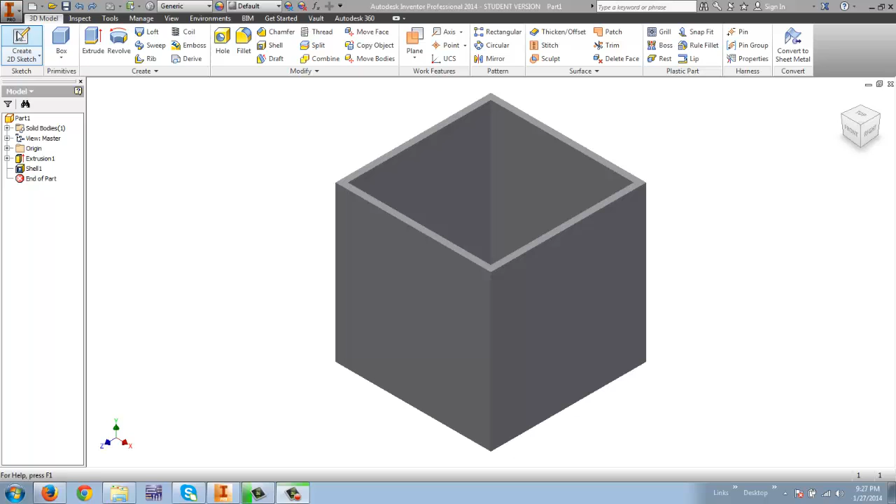Now I want to put an emboss or an engrave. We're going to talk about how to do that. I want to put that on my box. So I'm going to create a sketch on the front.

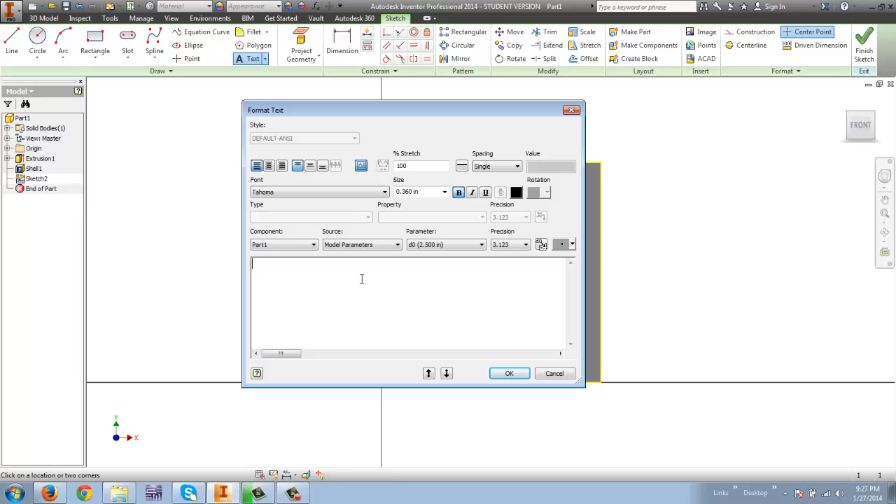And I begin by placing some text on there. You can click anywhere along here. And I want to make sure it's large, so I'm going to put 0.360 for my font size. I want to bold it, and I'm going to type IED puzzle.

And I'm going to replace that. I'm going to highlight all of that and center it and say OK. And here is my text. I can grab it and move it up. I can grab, well, that just changed it like that. I can grab a corner and I can drag it.

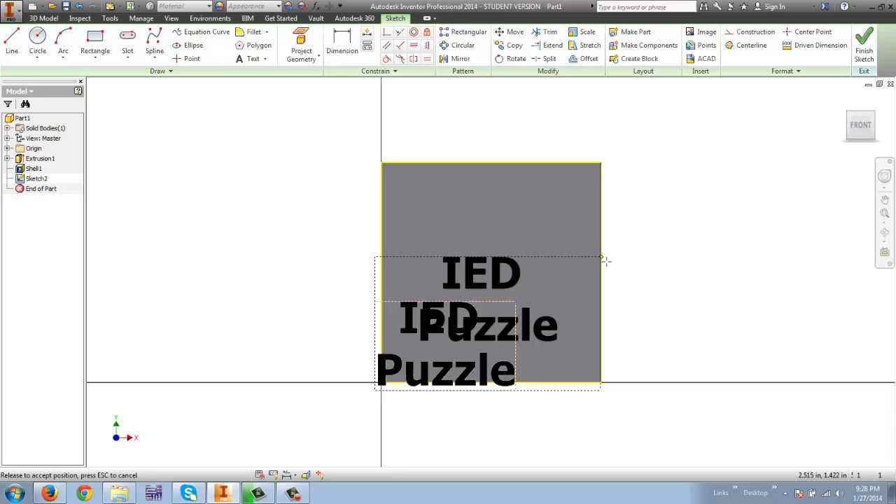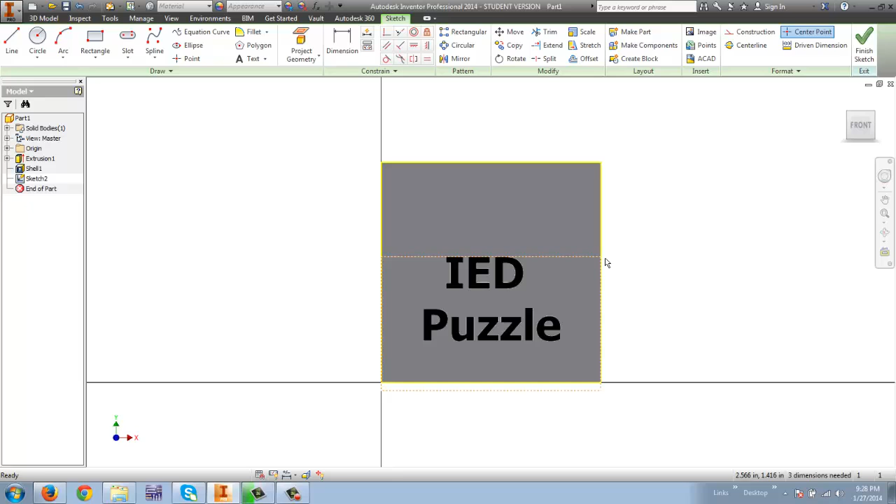If I want to make sure it's centered, this is one way that I could do it. I could actually make the box width be on the actual corners. That would be one way that I could center it. Another way, let me change my box size. Oh, you can rotate as well if you grab the corner correctly, and I've got that attached, so it's not going to let me change it.

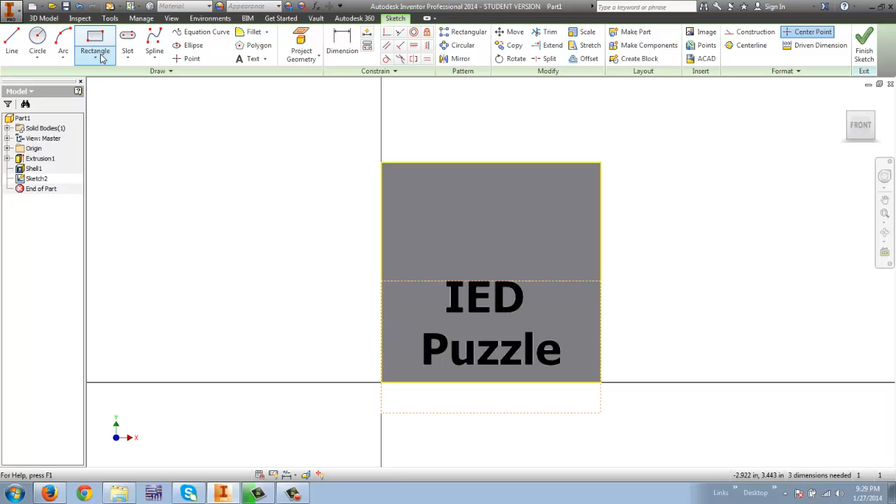You could dimension these sides from side to this little dotted line, and you could actually force it to be centered. I'll leave it like it is. I'm going to now finish my sketch, and I'm going to go to Emboss. I'm going to choose my profile, which is right here.

I'm going to get it highlighted in red, and I can either emboss, which adds material, it's an additive process, or I can engrave, which is a subtractive. I'll show you both of them. I'll say emboss, and I'll leave it adding about 0.05. Okay, that's about half the wall thickness, and say OK. And you can see it.

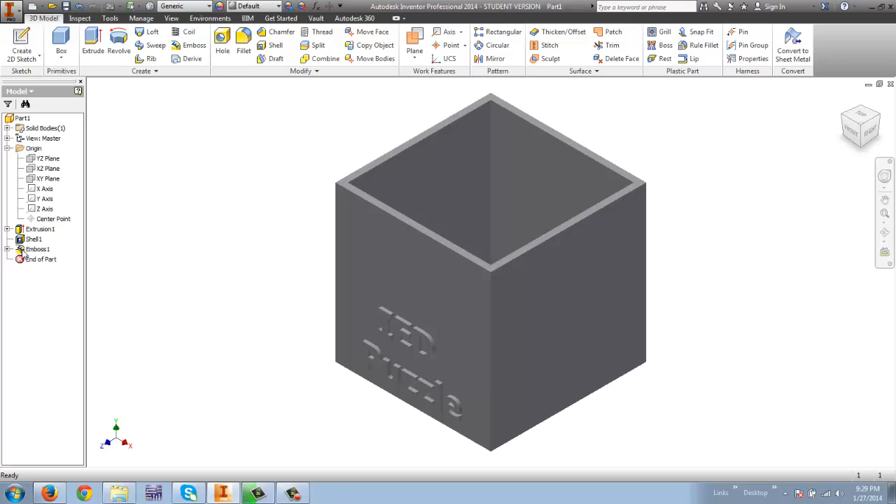Now, the cool thing is you can come over here to emboss, highlight that, and you could come over and change the default material to make it stand out. And I'll just say, let's make it dark green. And you can see that's dark green. Now I could change that.

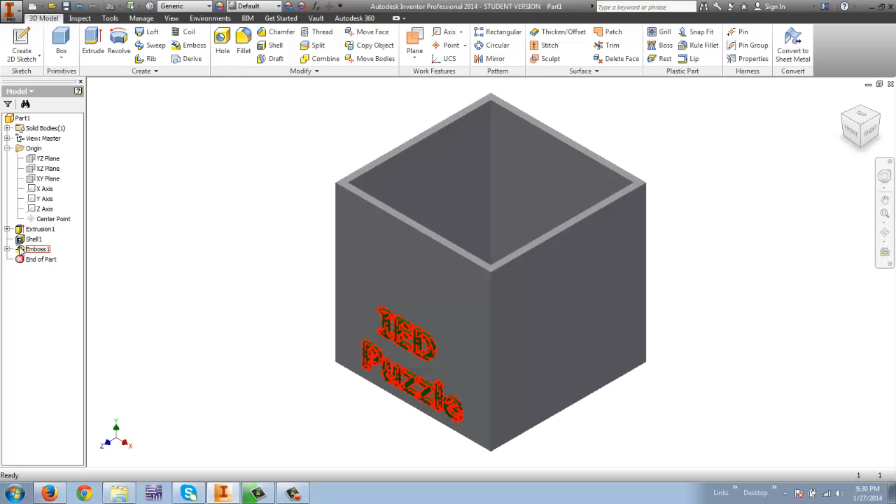Instead of making it emboss, which adds the material, I could make it engrave, which subtracts material. And you can see that actually cut it back into, if I zoom in, you can see it easier. It's cut back into the material. So I'll let you choose whichever way you want to do yours. That is something that you can do.

You can change the fonts. And you can change the font size. I encourage you to use something that is a pretty thick font. If you get something that's thin and too curly, it seems to have some problems.